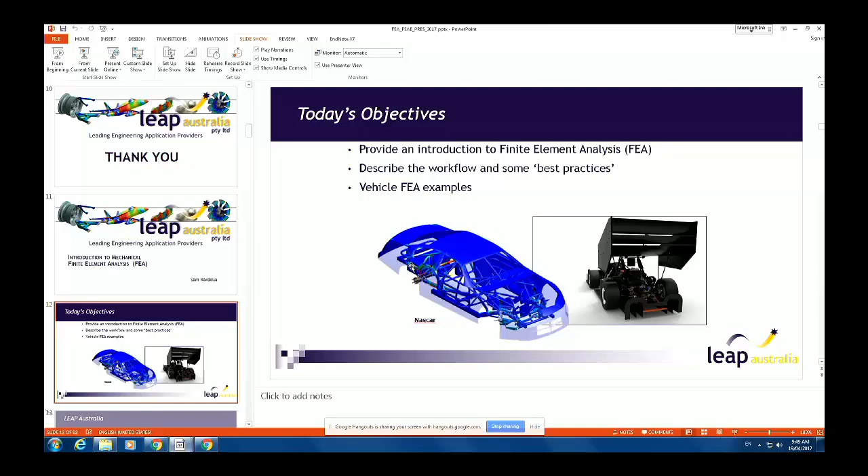So I'll go through basically just an introduction to FEA, and I'll show you some examples that are more focused on vehicle FEA examples. Some of them will be very specific, and hopefully some will excite you and show you some of the things that are possible with ANSYS, with application to Formula SAE.

Okay, oops, this should be... what are you seeing there? Sorry.

So why is simulation important? Here are a few animations I've picked out for applications for vehicles. If you look at some of these scenarios, if you did this with physical prototyping, it'd be quite a time-consuming and expensive process.

So here, this is basically a car crashing into a lamppost. We're looking at the lamppost itself. We don't want it to damage the car too much and kill the occupants. We don't want to crash too many cars into this thing because it can be quite an expensive process. So we do all of this on a virtual model, and then we do a final physical test.

You can see that those two things correlate quite well - you've got the real thing and then the simulation. So you can be quite confident in your virtual design before you actually commit it to being used.

So we've got a roadside barrier here with a car crashing into it. These tests again are quite expensive to undertake, so a lot of this stuff is designed in a virtual environment.

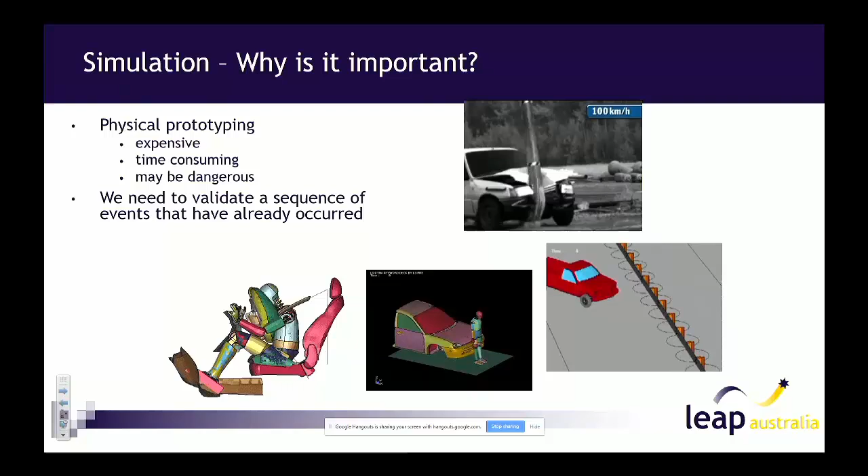Okay, so I'm sure a lot of you have heard the term finite element analysis. So what is it? I'm sure you're all familiar with this equation of motion - you've got static terms, kinetic terms, and inertia terms. You can solve this for a single particle, but we want to solve it for a whole system or a very complex model.

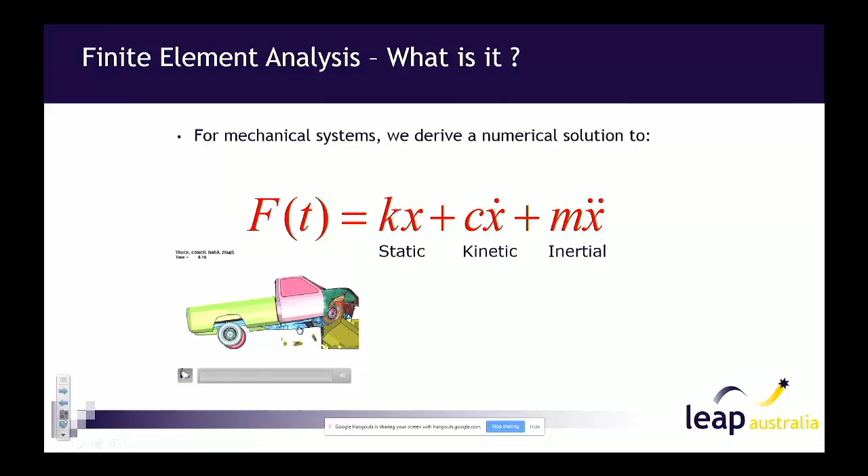Okay, so this is just another crash test. We numerically solve this equation for every point on this particular model.

Okay, so sometimes we don't have inertia terms. In this case, we've got a metal forming operation, so it's happening quite slowly, so we don't have any inertia terms. Our equation reduces, so we've got less terms in there.

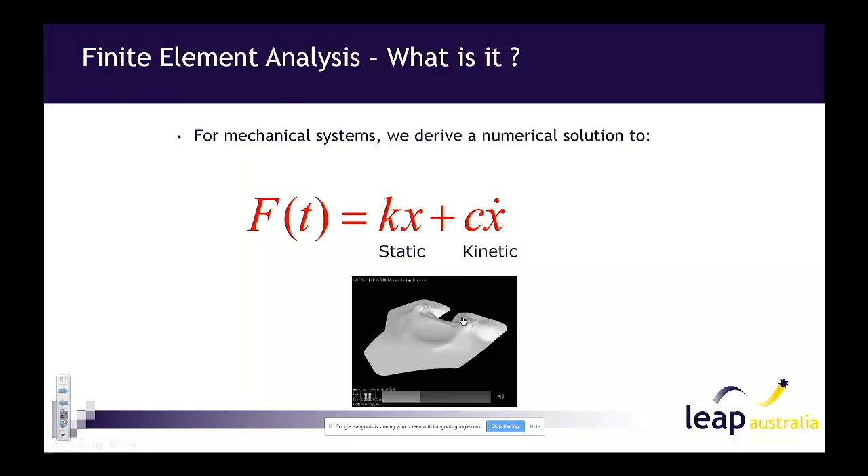Okay, so for most systems, we're looking at static behaviour. We don't have any acceleration or any velocity, so we just have F equals kx.

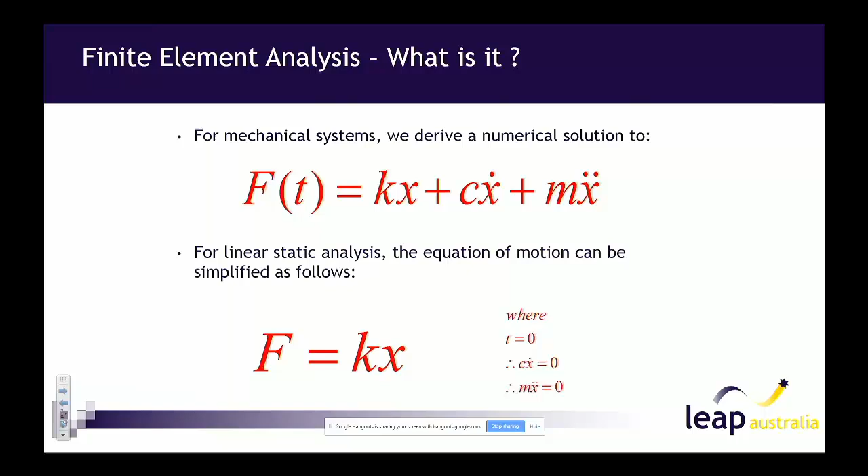So the easiest way to build this up to a finite element model is if we look at a simple system of just a spring. The spring has a stiffness that we know or we can calculate. If you apply a force, it will have a deflection. If you double that force, the deflection will double - this is linear behaviour. You can solve this just with a single equation.

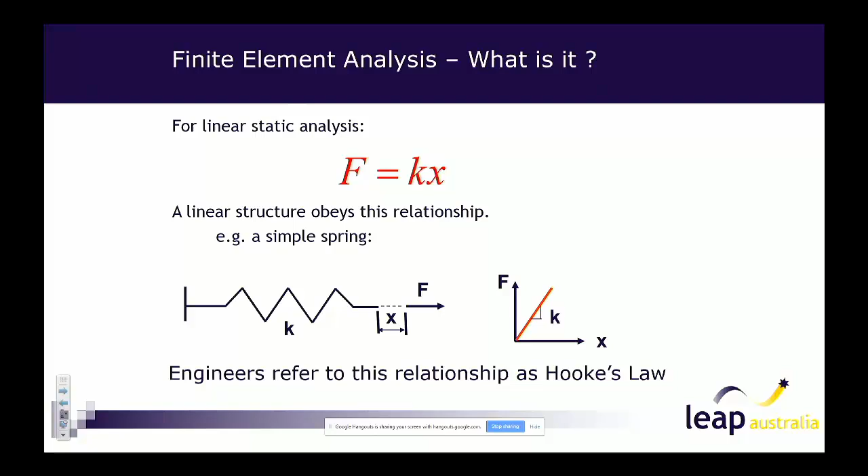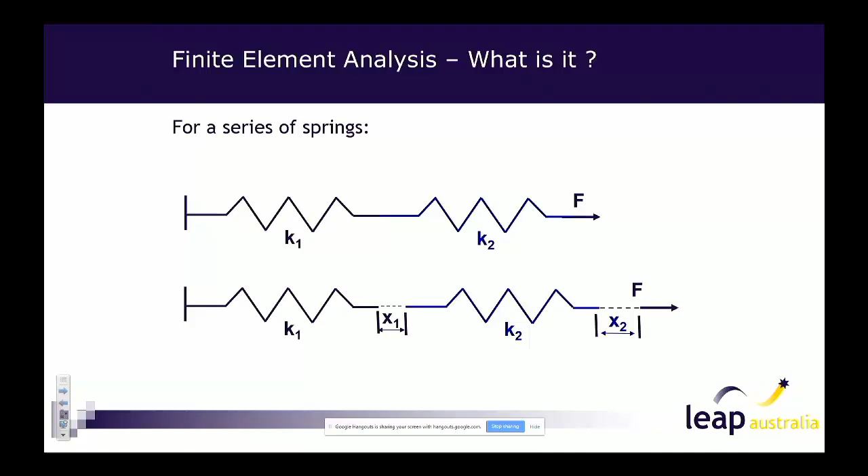So instead of treating these as one-dimensional springs, we turn these into elements. Instead of it being a single stiffness value, it might be a multi-dimensional stiffness, or we call it a stiffness matrix. Now we're calculating the displacements at these two elements.

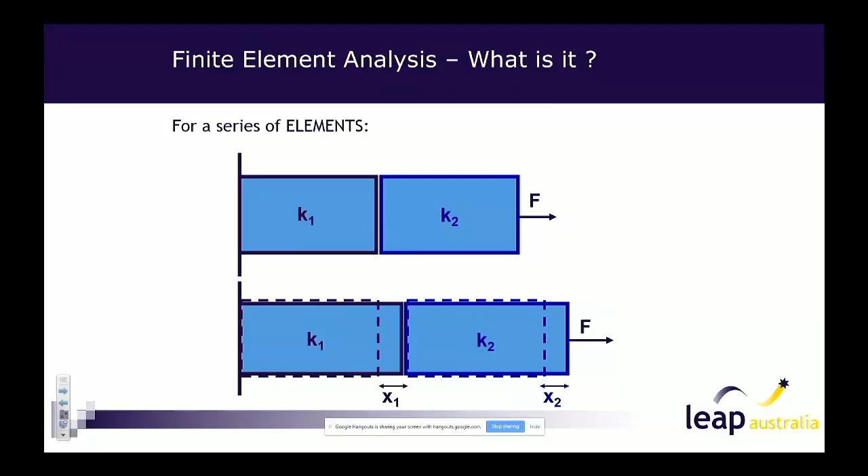Okay, so if we look at a more complicated solid, what we do is we take that solid and divide it into elements. At each one of these elements, it's very easy to calculate the behaviour at the nodes or the points that those elements interconnect.

So based on that behaviour of each individual element, we build that up until we get the behaviour of the entire structure. So now instead of us having an equation with, say, a 2 by 2 matrix, we have a matrix that can be n by n, where n is the number of degrees of freedom of the model.

So the models are built up of these individual building blocks called elements. Here we've got a 10-node tetrahedron, and here we've got an 8 or 20-node brick element, depending on whether it's high order or low order. So if you have a model with just one element, you've got 10 times 3, so 30 by 30 - you've got a 30 by 30 matrix.

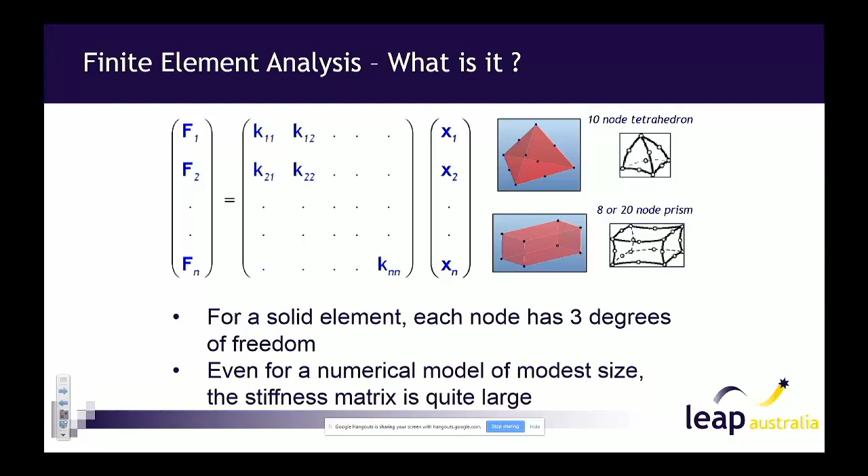If you think of this as a much larger model in terms of how big the model becomes, here we've got 3,500 elements, nearly 16,000 nodes, and just under 47,500 degrees of freedom. If you try and solve this by hand, you'll be there for quite a long time. 10 by 10 equations maybe you can solve fairly easily, but for much larger models, this is why FEA was invented, so you can solve quite large problems.

When I first started using the software, probably 1.7 million degrees of freedom was about as much as you could solve on a 32-bit machine. But now there's pretty much no limit to what you can solve because you've got access to very high-performance computers. Today a 1.7 million degree of freedom problem you can probably solve in 5 minutes. The first time I attempted a model that big, it took probably 5 or 6 hours, and if it was non-linear, you're talking about maybe a day and a half to solve. So those days are gone - a 1.5 day model, you guys probably wouldn't see a model like that.

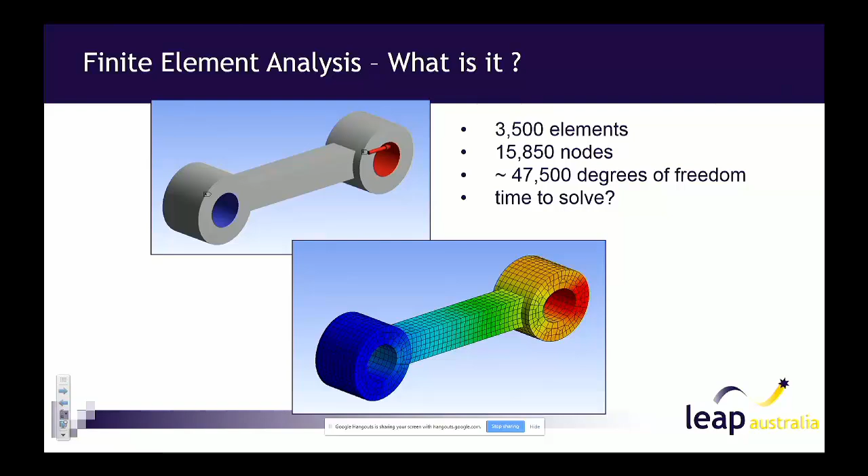Okay, so in terms of the types of finite elements that you can use - if you've got a very complicated shape like this fan blade, or basically a pump impeller, it's quite a complicated shape, so you need to represent it as it is, as a 3D solid. All of the geometry is kept and represented.

So something like this - this is basically just a car body, so it's a very thin structure, thin plates. You can represent that with 2D shells, where you numerically model the thickness. If you were to model this with solids, it'd be a much more complicated model.

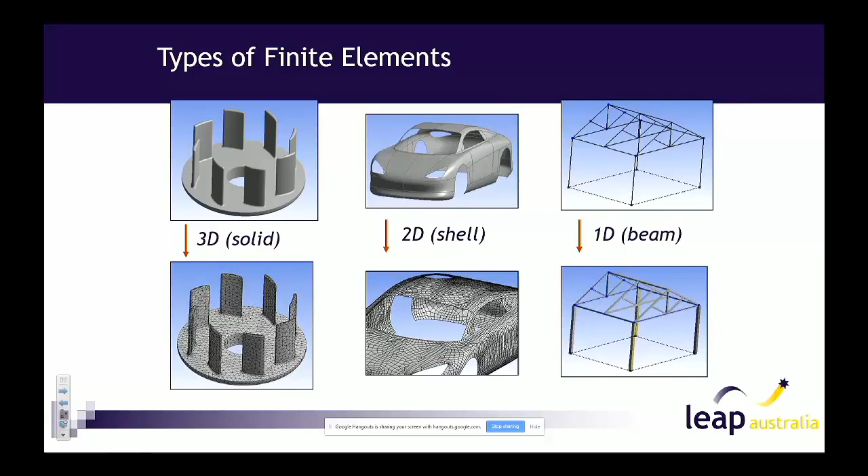So here we've got a 1D model. We call it 1D because it's just a line, and you assign the cross-section property to it. Something like a space frame chassis you could represent as a 1D model. If you're just looking at the overall stiffness behaviour, not so much the stresses at the joints, you can get away with a 1D approach. If you compared the number of nodes you'd need to do a 1D model versus doing it as a 3D, you're talking about maybe a couple of hundred nodes here to maybe a few million if you did it as solids. So the solve time difference between those two is quite significant.

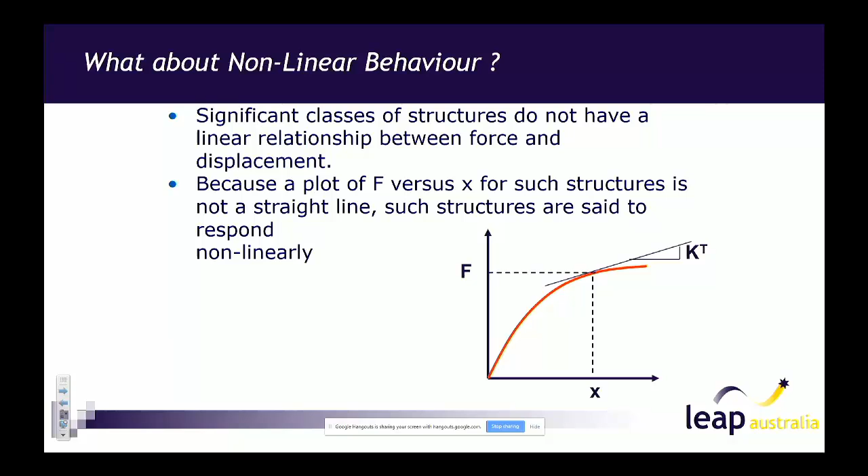So that can be based on a number of different factors. Okay, so it can be because of your geometry - if your geometry changes shape, the stiffness of your structure can change. If you think of a fishing line, it's very flexible, so you calculate its stiffness based on its initial geometry. When that geometry deflects, it's going to have a different stiffness because its shape has changed quite significantly.

So you can also have material non-linearities. This isn't only when you've got metal plasticity or materials yielding, it can also be rubber materials where you've got quite large strains. Normally in small strain regions of say 0.2%, you can use your initial length to calculate your strain, but once you get strains above a couple of percent, you can't use that approach anymore - you need to incrementally calculate your strain.

So the third one is contact nonlinearities. When I say contact, when bodies interact, different areas might be in contact, and that will change your load paths and your characteristic stiffness.

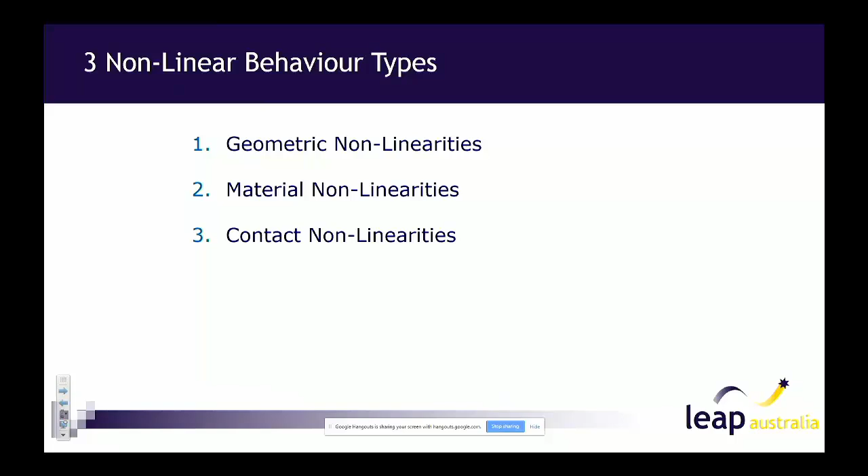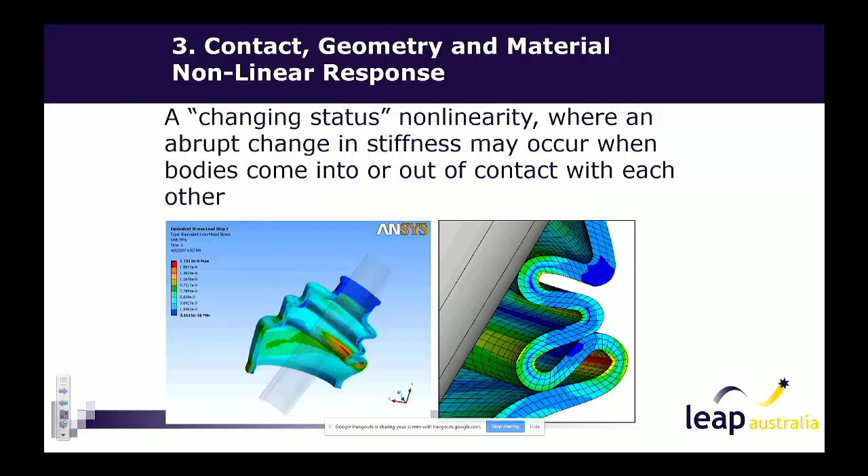Okay, so when we have an FE analysis, we follow a very specific workflow. So I'll go through these steps to explain the sorts of typical things that you would do.

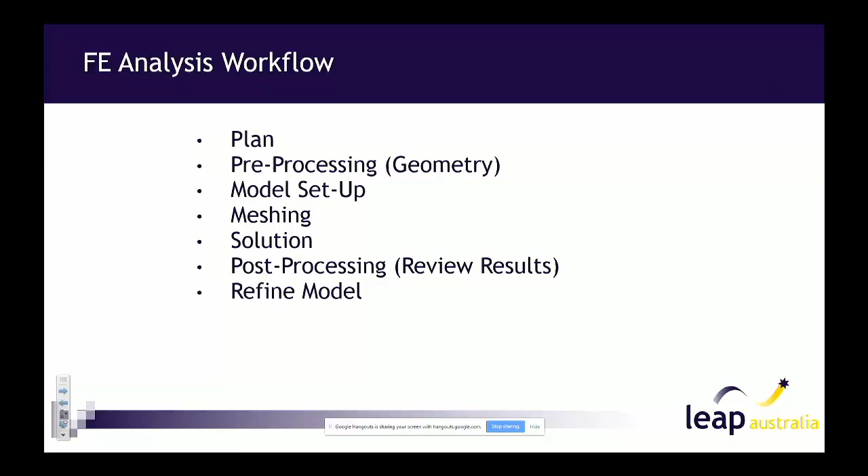So the first thing is to plan your analysis. What sort of analysis do you need to do? Is it just going to be a static analysis? Does it need to be a dynamic analysis? Is there inertia effects present? Do you want to find natural frequencies?

So then you need to decide what sorts of results you want to look at. Do you want to look at maximum deflection? So if it's just your suspension arms, you want to see how much they deflect under load, or do you want to find the stresses in your structure? So that will sort of determine what sort of modelling you need to do.

So do you need to account for non-linear effects? This is one that a lot of people sometimes skip over. They think because it's small deflections and linear elastic, there won't be non-linear effects present. That's not always the case.

How quickly do you need your results? If you're after just a quick result, so if it's just a static deflection of your chassis, you can get away with beams. If you're wanting to look at stresses at all of your joints, then you probably can't get away with beams. You might need to use, say, a sub-modelling approach, which you'll learn in one of the workshops. Or if it's just the crash attenuator on the front, you don't need to model the whole chassis to do that. You can just model the crash attenuator and a little bit at the back that holds the attenuator in place.

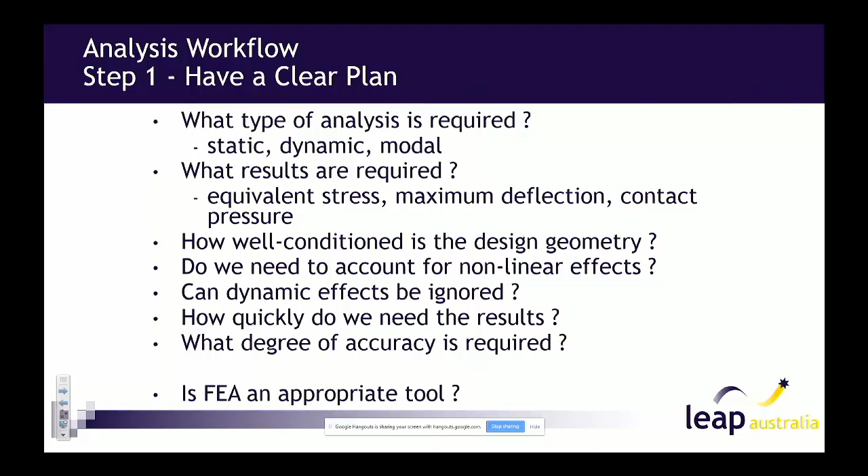Okay, so is FEA an appropriate tool? Maybe not. You might be able to get away with hand calcs. If it's just a static deflection under load, you want to see how much your springs compress. FEA is probably overkill for something like that.

So it's usually reserved for very high-speed impacts, highly non-linear behaviour in materials. You're talking about very high strain rates. Usually what dictates it is if you've got significant inertia forces, so there is some sort of overlap. Something like metal forming, you can do as either an explicit or an implicit. For a crash simulation, you may be able to get away with an implicit simulation, but if it's highly non-linear, you probably need something like an explicit simulation.

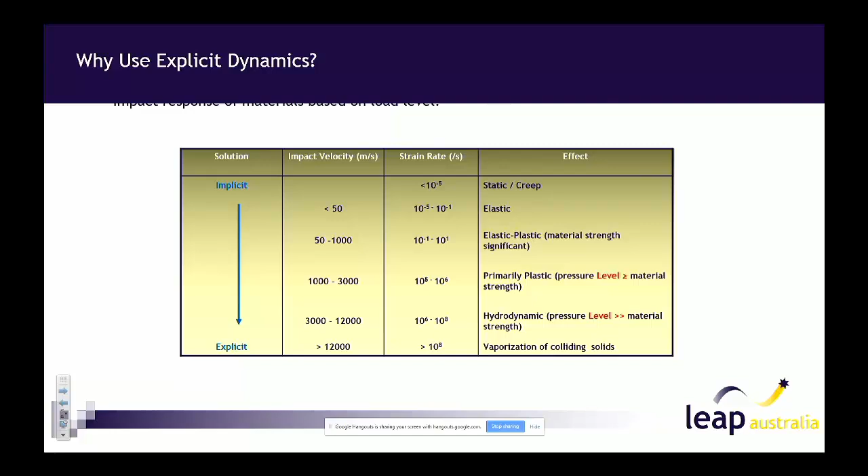Okay, so the second step is geometry. Most of the time you'll have some sort of CAD geometry there already, so it's just reusing that geometry for simulation.

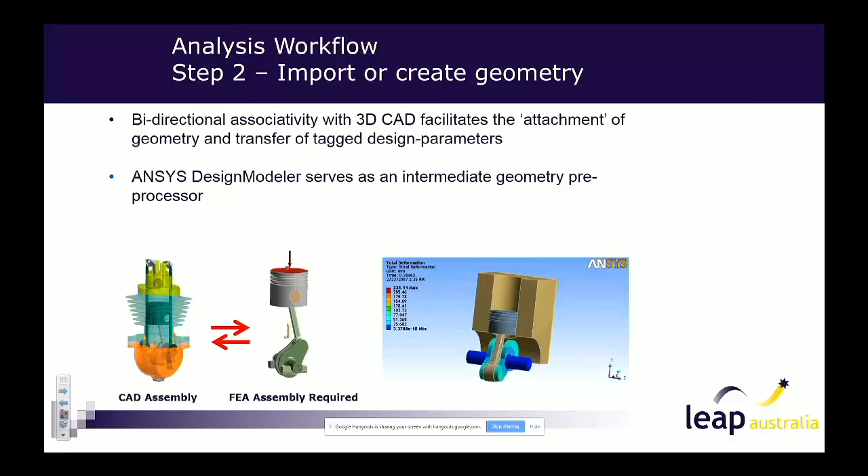And here we've just got stresses showing on the crankshaft, so you can sort of use a mixture of rigid and flexible bodies. If you're interested in just some parts of the structure, this simplifies your analysis quite significantly.

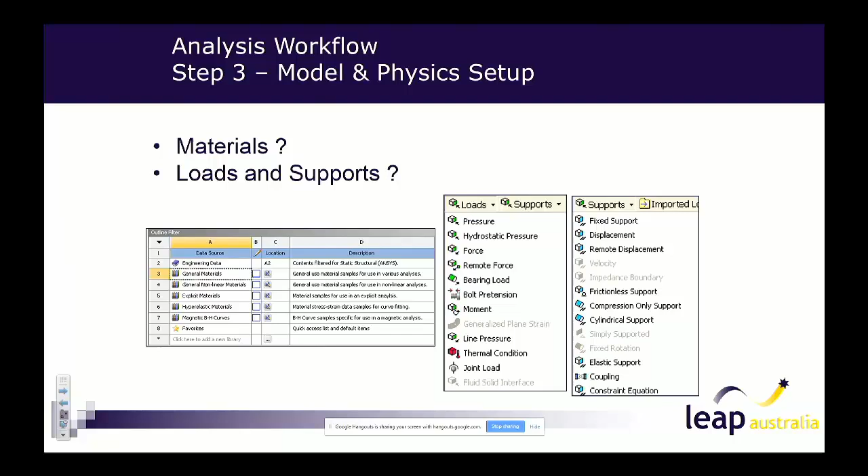Okay, so the third step is your setup. Material properties - normally they'll be fairly standard material properties, so ANSYS has got inbuilt libraries for those materials. And then the loads and supports, you can usually just use something fairly standard, they'll fall into one of these sort of categories. So you probably won't have very complicated support conditions that won't be covered by the standard conditions available inside the software.

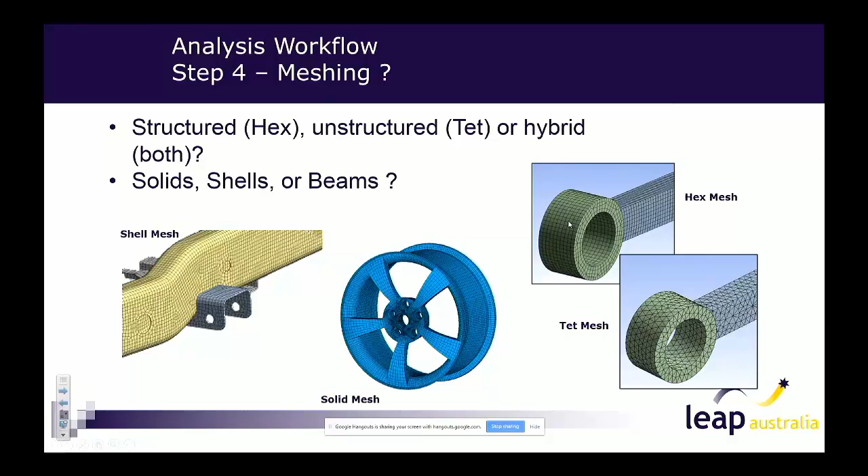So these two meshes will give exactly the same results. So sometimes it's not worth investing extra time to get a hex mesh, especially if you're after very quick results as well.

Okay, so probably one of the most common questions people ask: how do I tell how good my mesh is? Well, there's some checks or metrics that you can look at for your mesh. It's not going to be excellent everywhere. If you try to achieve these excellent metrics everywhere, you probably spend days meshing. So you really need to get the metrics very good in areas of interest. If you've got an entire model, it might only be part of the structure you're really interested in. So you make extra effort to get the mesh good in that particular area.

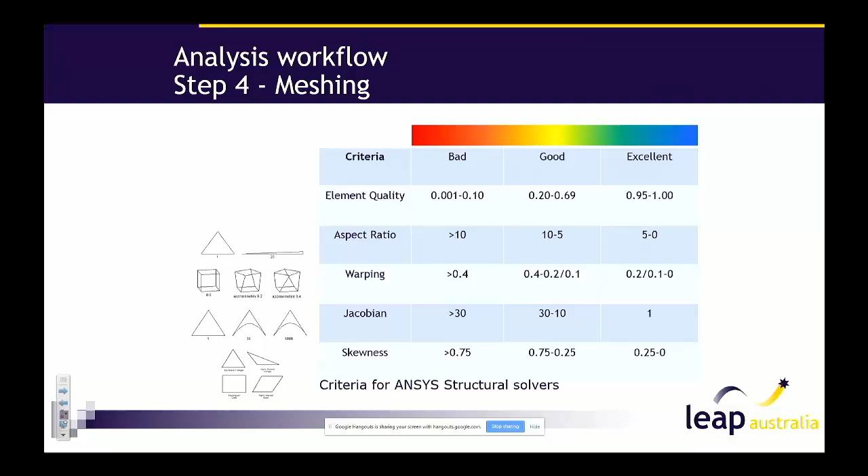Okay, so the fifth step is the solution. What sort of solver are you going to use? Do you need to use parallel solve or distributed? If you use distributed, you might be using multiple CPUs to try and get the solution to solve quicker. By default, the software will solve on 2 CPUs. So if you've got a multi-core machine, running it distributed can help speed up that solution. So if you're after results really, really quickly, just use more CPUs in your distributed solution.

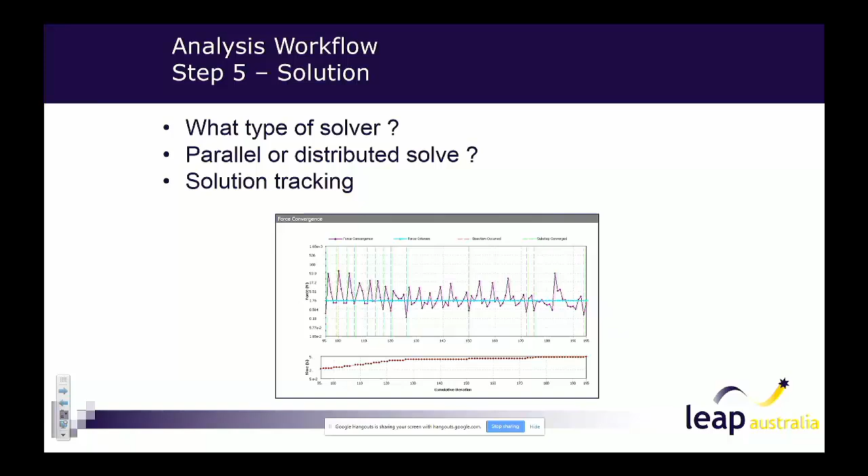Okay, so once you've got a solution, you would review your results. This is just a static image, but if you animated it, you'd make sure your deflections were going in the correct directions. Usually you have some sort of idea of what your results will look like. So you've got to be very careful with how you interpret your results as well. It's very easy to get believable results and the results are incorrect. So one of the first things you would do, check your reactions. Do they balance your applied loads? If you've got gravity applied, is your structure deflecting in the correct direction?

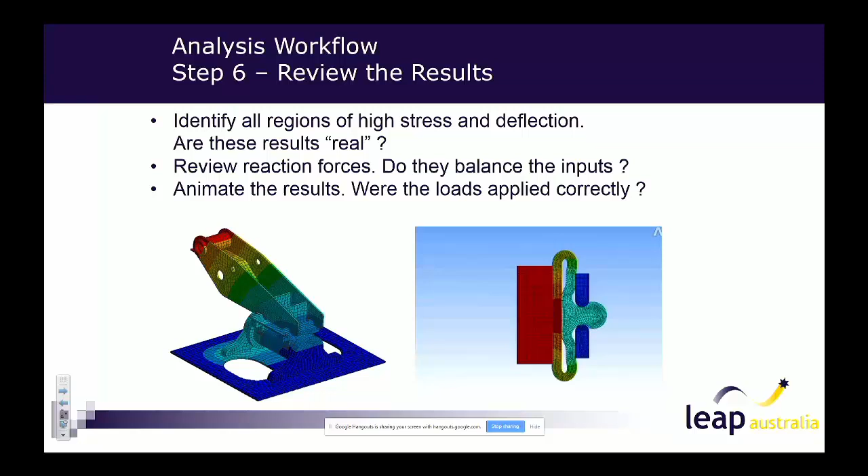Okay, so after you've made your first pass of a solution, you might need to do a second pass. Usually for more complicated models, you go through an iterative process. You start simple and then you increase the complexity. So here we might find that we've got very high stresses at this sharp corner. So you might have a look at the stress gradients. If they're quite high, it might mean you need to refine your mesh. When you refine the mesh, it's going to take longer to solve. But this might be the only area in a very, very large model that requires that refinement. So you wouldn't put this fine mesh everywhere because it's going to take longer to solve.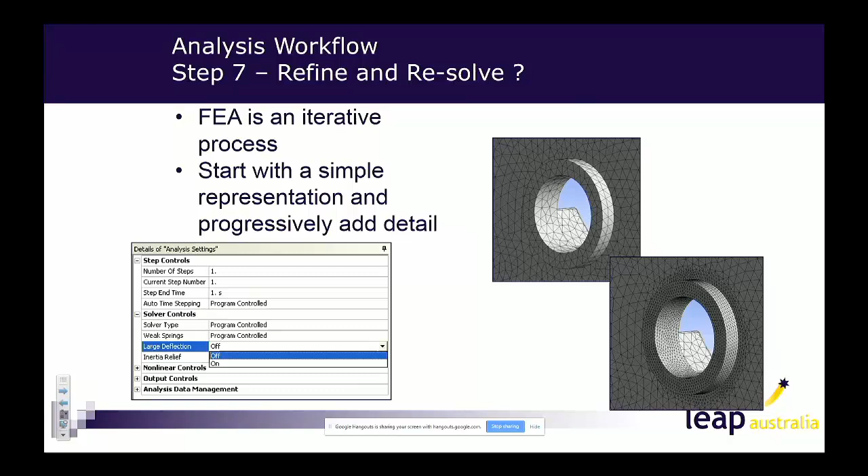So a lot of people think that FEA is a black box. It's not. The equations that it's solving under the hood are very easy to understand. So there are oftentimes very easy checks you can do to your results, just to get a sense of whether or not the results that are coming out are meaningful.

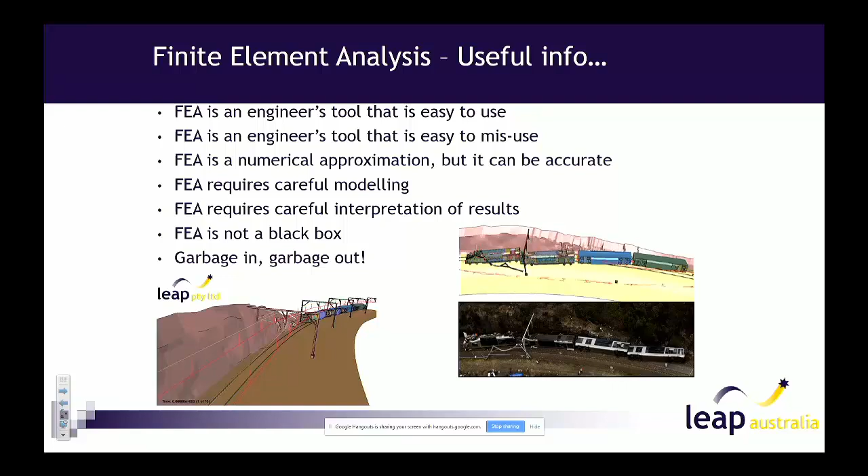Okay, so now for some vehicle examples, some different FEA applications. Okay, so brakes. I'm sure a lot of you are probably going to be doing FEA on the brakes of your cars. So you can look at things like the temperatures of the discs. If you're machining them to make them thinner, you obviously want to ensure that the thermal performance isn't degraded. You don't want to overheat your brakes, because then they won't work as well. You can look at how the brake interacts with the upright. You can maybe estimate the loads or include the brake disc and apply some loading on there to see how that load gets distributed through the rest of the suspension system. You can include CFD in this as well to look at the cooling of the brakes.

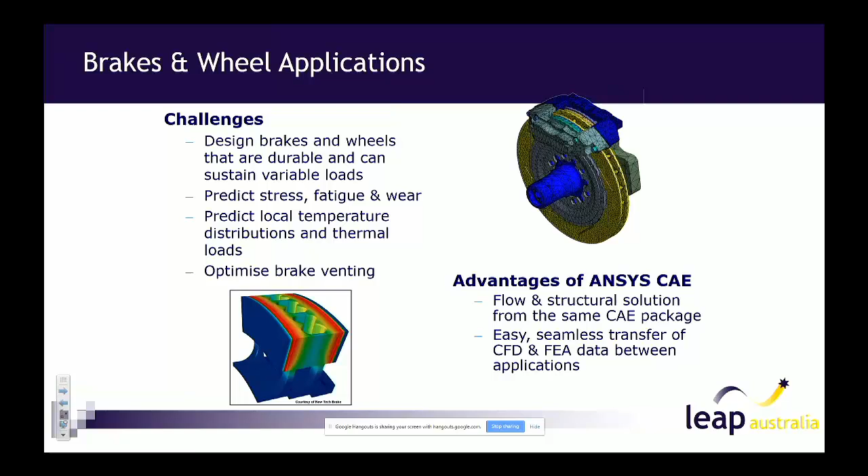Okay, so you can do things like predicting brake squeal. In a race car, that's not so much of an issue; usually that's an indication that the brakes are working. But on a passenger vehicle, it might be something that someone in a very high-end car doesn't like to hear. So you can use FEA to simulate that as well. Brake squeal is basically induced from vibration, so it's frictional slip, almost like a chattering. So you can simulate that quite easily.

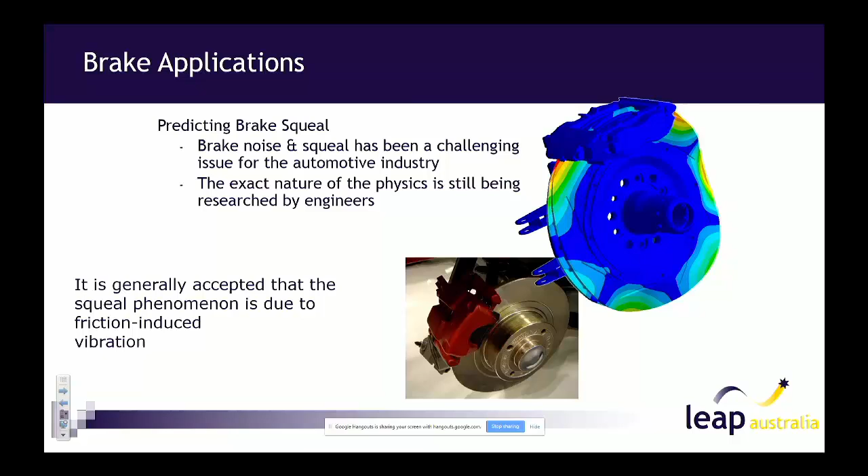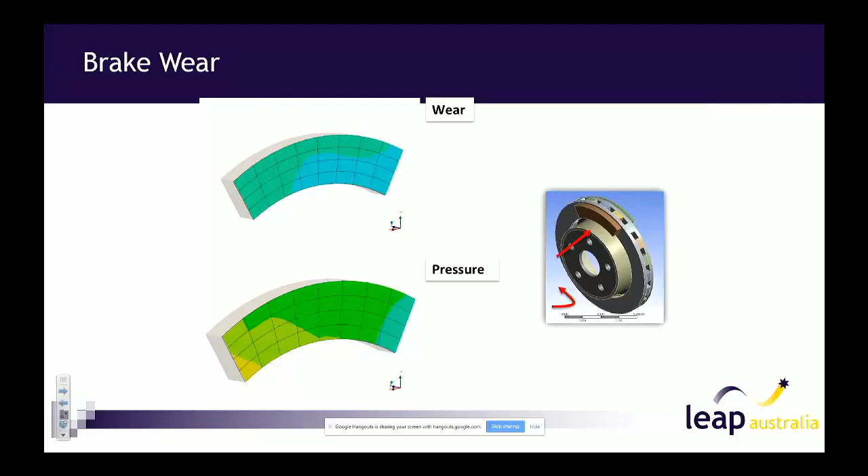Okay, so you can look at things like brake wear. As the brake pads wear, the pressure distribution will become more even across the pad face. So these are the sort of things you can simulate as well.

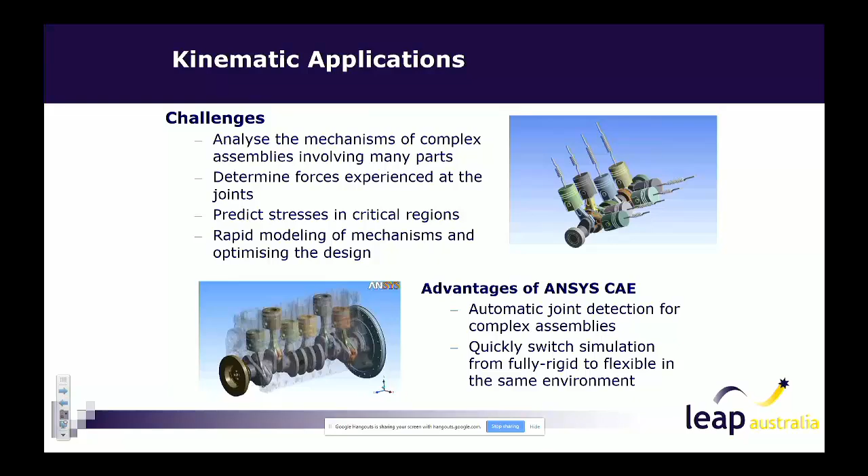So something like this engine. All of the joints are detected automatically as you bring the model in from CAD. You might need to fine-tune some of the behaviours of those joints, but it's very easy to set up your mechanism behaviours. And you can also model some of these bodies as flexible and some of them as rigid. So if you had an entire suspension or one corner, you might want to look at the upright as being flexible and the rest of the structure as being rigid, just to simulate the load paths.

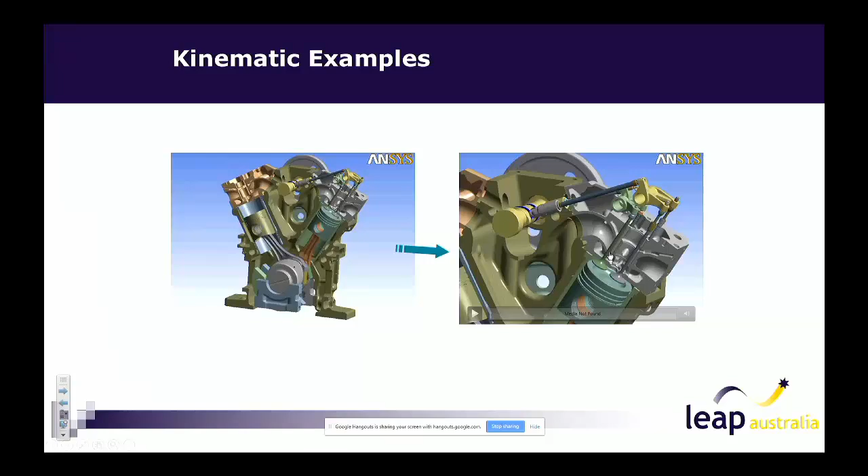So when you look at how bodies interact, you can do it with either joints or with contacts. So joints are probably easier to generalise. So you might have, say, a spherical joint or a revolute joint. So they're very easy to set up, and they're simpler than doing it with contact. It's not to say that contact isn't an approach you can use. It's just that the joints make it simpler to set up and sometimes easier to solve.

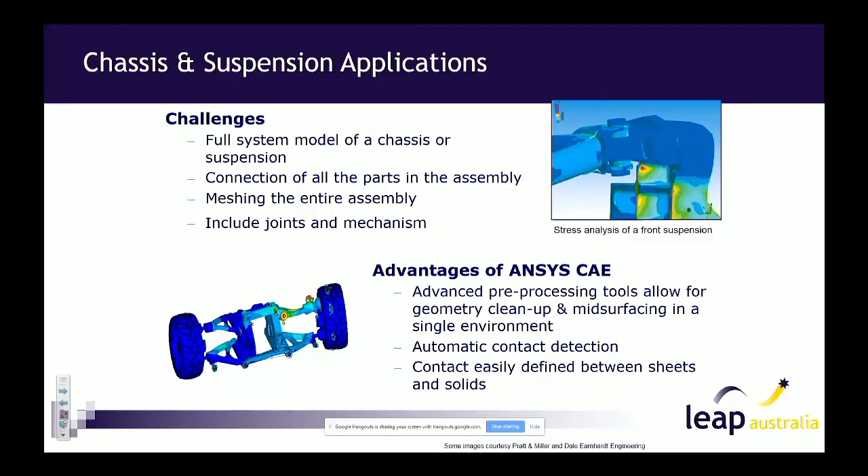Okay, so please let this animation play. All right, so this is basically a space frame. So everything is rigid except the tyres, and we're exciting the car by having it ride over bumps. So here you can see it's quite extreme. The wheels are leaving the ground. So obviously the car is not going to be able to slow down or speed up with the wheels off the ground.

So if you're looking at trying to see the effect of, say, spring rates or damper rates, or maybe even the bell crank, if it's got any non-linearity built into it, if you want to quickly see how that will change. So if this is the car in, say, the early design phase, you don't want to be changing things like bell cranks when the car's already been built, and you find out as you're testing, you go over a bump, the car's off the ground, and then you're in the barrier. That's not what you want to have happen.

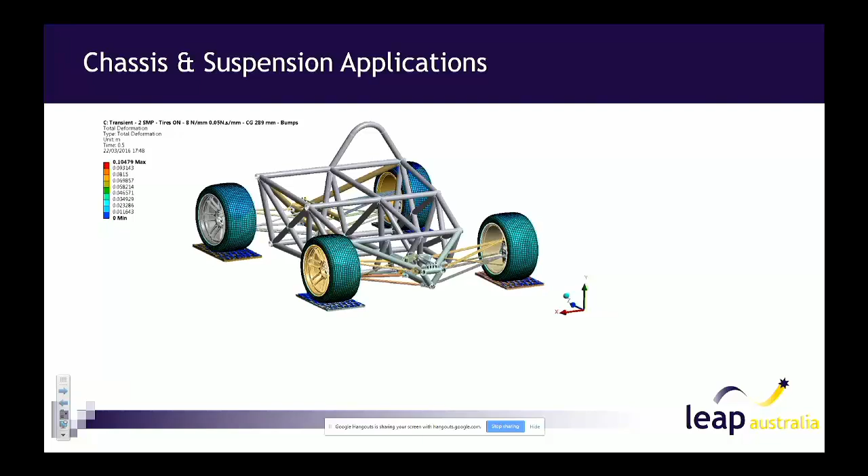So you can extend the complexity of this model. So this is basically almost like a 4-post rig. So you can have motion with this as well. So I've got a very, very simplified model of just a box with wheels on it and applying some steering, and you get this sort of dynamic behaviour going on. So there's no reason why you couldn't do this with this car and then put things in like tyre slip angle behaviour to get a very complicated dynamic model.

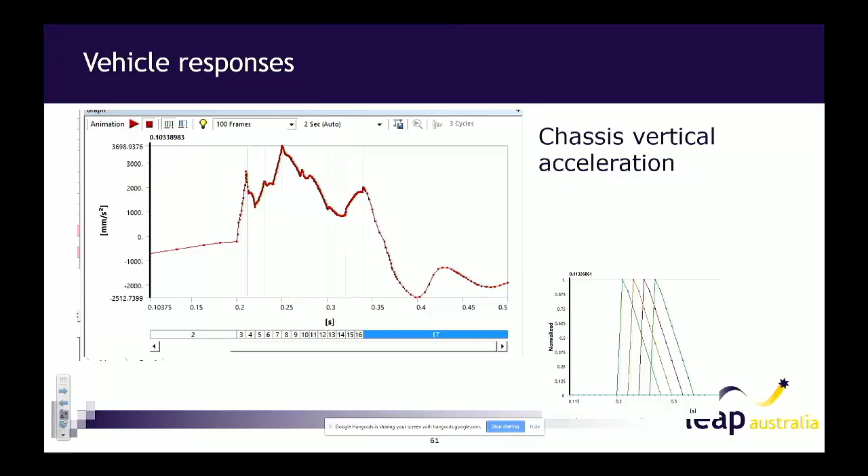So the sorts of things you can get out from this model, so this is the vehicle response, the vertical acceleration, and then these are basically the 4 bump inputs. So they're out of phase to try and see the behaviour of the car as it rides over road irregularities. And these are the 4 spring compressions. So the springs have got both stiffness and damping, so you can change those values to see the behaviour of the car. So you might want to get these spring deflections down to try and keep the car on the ground.

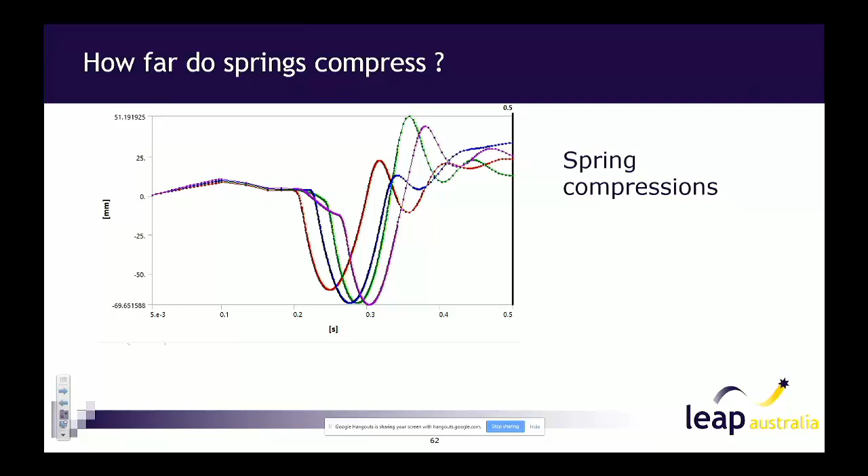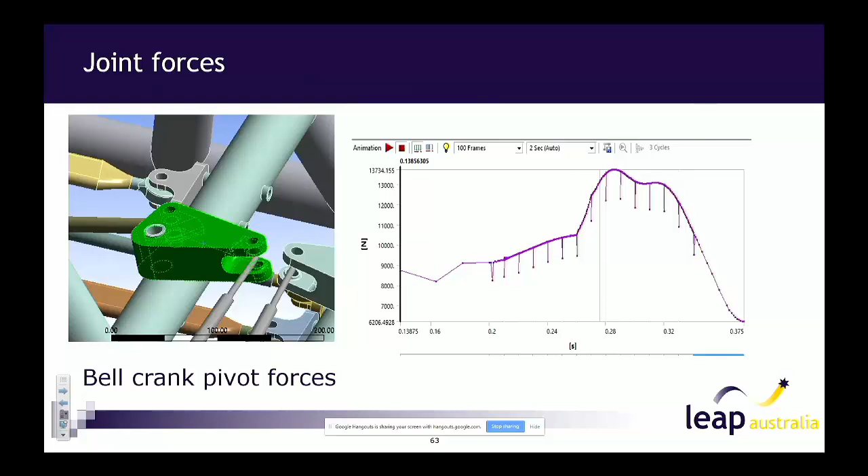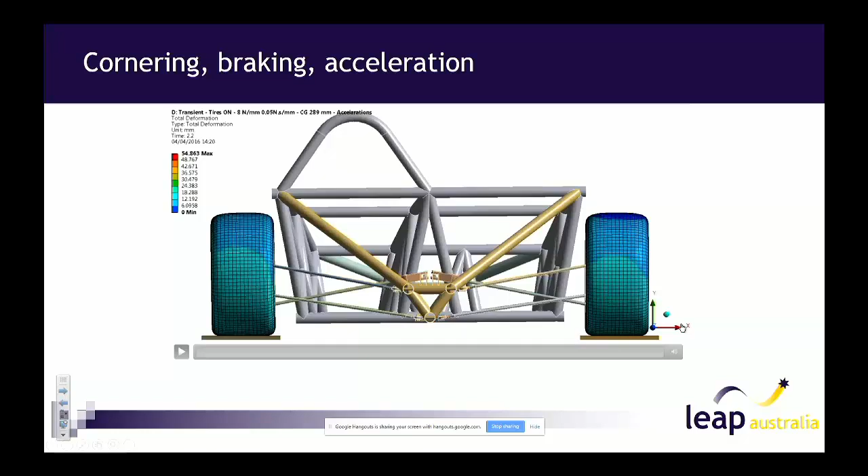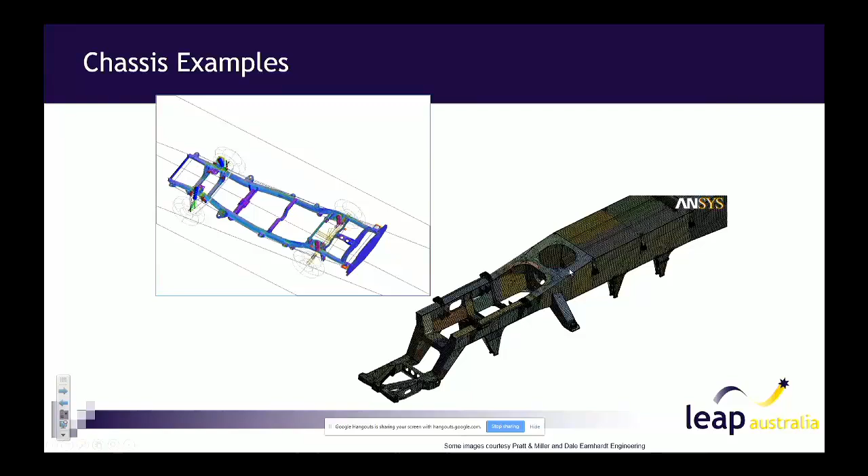Okay, so here this is this one there. So it's basically a suspension from, I think it's a NASCAR. So it's quite rudimentary. So you can see the upper and lower A-arms are modelled as flexible. So you've got the contours of the stress as it's sort of riding over a bump and steering. So the other parts there are modelled as rigid bodies. So that's just to provide the load path for the loads in the structure.

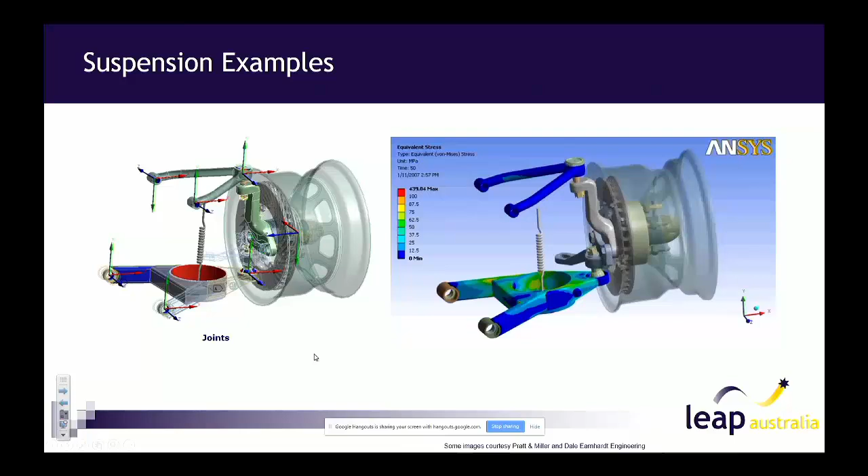Okay, so there's a few, I guess, best practices you should follow. So you should always have a clear objective of what you want to achieve with your simulation. So it's going to drive things like what sort of elements you use, whether you use a CAD model or whether you just create something from scratch in Design Modeler. And whether you de-feature as well. So in terms of setting expectations for your customer, so the customer is normally yourself, or someone else in the race team.

So the important thing to remember is there's always some sort of trade-off. So it's usually how long it's going to take you to solve versus accuracy. So there'll be a point where you throw more elements at a model, you're not going to get your results to be any more accurate. So as you start doing more simulations, you'll be able to determine where that point is.

So when you're sort of doing your first few simulations, you might need to do some sort of mesh sensitivity study to see when your stresses stop changing. So that usually takes a little bit of practice. So you can always lean on us to say, hey, does my mesh look right for what I'm trying to do? We're more than happy to answer those sorts of questions.

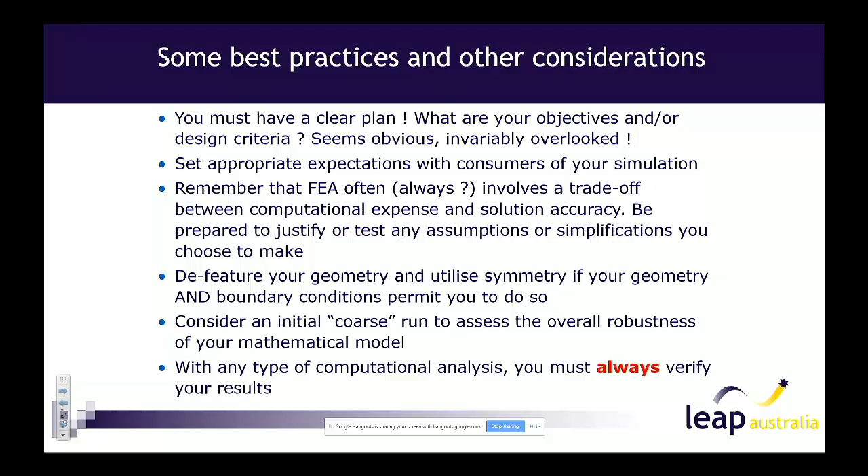Okay, so when you go out into the workforce, you'll be expected to have a basic understanding of how these tools work. So you might be checking other people's results who are using simulation tools. So if you're getting someone else to do simulations for you, you need to have an understanding of the results that they give you. So a lot of people fall into the trap of relying heavily on the person who does the FEA, and then they just accept the results that they're given. You should always be vigilant in checking your results. So don't just trust what you get out. Always check.

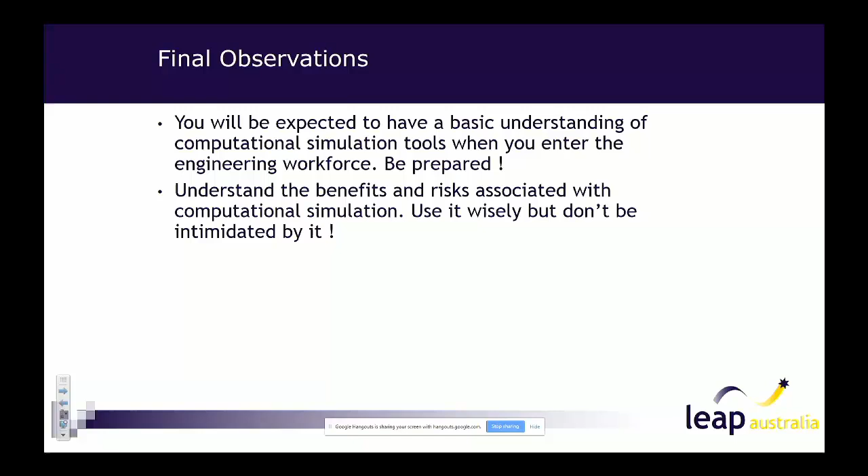Okay, so there's benefits and risks with doing simulations. So like I said, whenever you're doing sort of more advanced things, so if you're doing, say, a crash test in a simulation, you would always do some sort of final physical test to see that your FEA results are giving you what you expect. So it will give you more trust in future simulations that you do. Okay, so don't be scared off by FEA. So learn to use it, and then learn to understand the results, and then you won't be so intimidated by it.

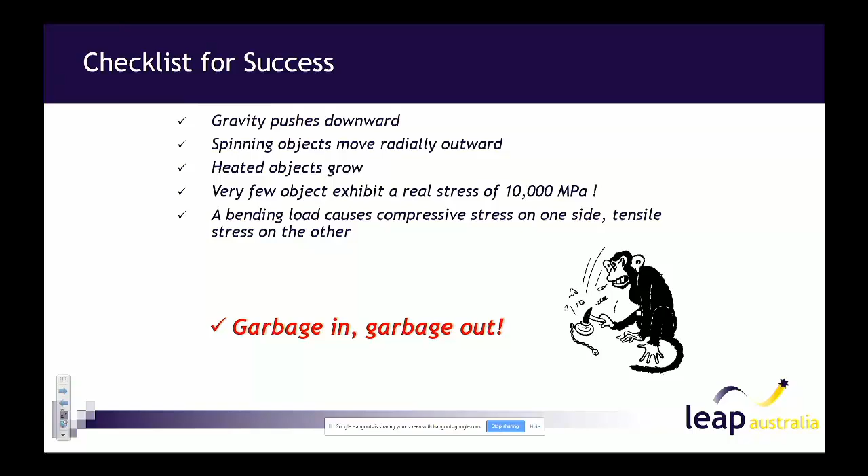Okay, so this is just a little checklist. So gravity pushes downwards, spinning objects move radially outwards, heated objects grow. You don't see stresses of tens of thousands of megapascals. So if you see that on a model, start looking at things like your material properties, or if it's a stress singularity. So bending loads, so I mean you understand that one side's got compression, one side's got tension, so it's very easy to check those sorts of things.